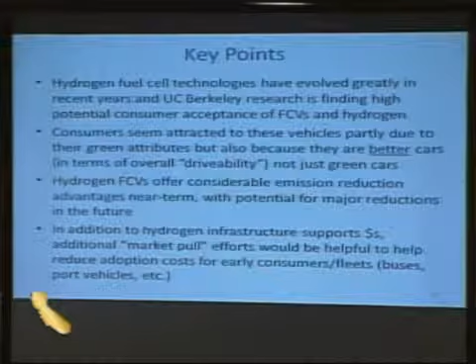And they have significant emission reduction potential near term, depending on how the hydrogen is produced, with potential for major reductions in the future, as you mentioned, if we could get to some sort of clean electrolysis with low-cost electricity. We could actually get to zero carbon, which is where I think we all agree we need to go in the longer term. Even the G7 summit, they were just talking about the need to break away from fossil fuels in a big way. And so this offers a pathway where we use natural gas initially as a bridge to that ultimate low carbon future. So we'll talk a little bit about what the state can do in a minute.

I'll go through these pretty quickly because I know you want to ask some questions. Our program started in 2005 with a Daimler A-Class vehicle, which is actually a predecessor to the B-Class vehicle that I drove up in here today. I'll show you a picture of it in a minute. In 2008, we got 3 additional vehicles, and these vehicles were all operating at 5,000 psi hydrogen, which is a little more pressure than a scuba tank. And they offer driving ranges of around 100 to 160 miles, which consumers found interesting, but they were similar to the ranges that battery electric vehicles were offering at that time.

What happened around 2008 was a move in the industry to go to higher pressure storage, 700 bar or 10,000 psi. And we built a small station in Richmond at our UC Berkeley facility with Toyota and the Air District. It actually became the first high pressure hydrogen station to become operational in Northern California. And we've learned a lot from operating that station over the last 4 years.

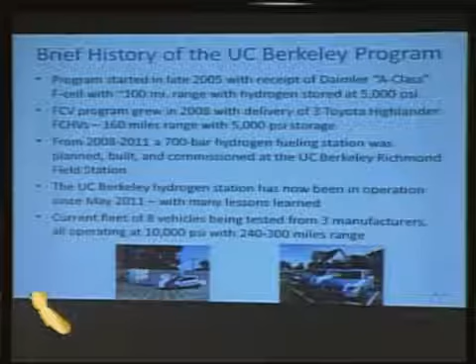I will say the infrastructure is really the key issue at this point. The vehicles, I'll show you in a minute, the consumers really like. The performance is great. We're now testing 8 different vehicles from 3 different manufacturers with ranges of 240 to 300 miles, and as you mentioned, the quick refueling capability of about 5 minutes, 4 minutes.

These are the vehicles we're currently testing. The one in the foreground here is the newest one. It's a Hyundai Tucson fuel cell vehicle that's now being leased in Los Angeles for $500 a month, which includes fuel and maintenance. The next vehicle, this is where I was this morning. It's not that exact picture, but it was that vehicle that I drove up here today, and this is the B-Class Mercedes vehicle that's about 240 miles range. Actually, a several-year-old technology at this point, but still driving great.

And then here's our Richmond station and the newest station in West Sacramento, which just became available a few weeks ago. And now you can go into the West Sacramento station, swipe a credit card, fill up in 4 minutes just like a gas station, and off you go with 250 to 300 miles range.

This is kind of an older slide from Ballard, which is a Canadian company up in Vancouver, but it shows the kind of progress through the 1990s of this fuel cell technology. And I was a graduate student, as you mentioned, at UC Davis in the mid-1990s when the fuel cells looked kind of like this, and this is 5 kilowatts of fuel cell, which isn't really even enough to drive a car. You don't really have a sense of scale here, but that was a lot of material and way too much stuff to try to put inside a vehicle.

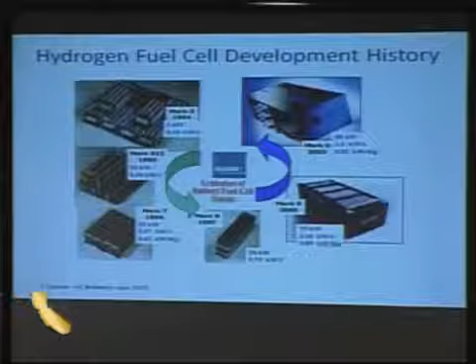But through a tremendous amount of engineering through the 1990s, by the late 1990s, we were getting 50 kilowatt stacks, which is about enough to drive a car. That's about 60 or 70 horsepower. And then fully packaged systems by the early 2000s that could offer 100 horsepower. And by the way, 100 horsepower electric is something like 150 horsepower gasoline in terms of how it feels when you're driving, because you get much better torque from electric motors, so they're not quite comparable. So this is plenty of power to drive a vehicle by the early 2000s.

This is, again, an older slide, but it shows some of the evolution from that early A-class vehicle that was about 100 miles range to this newer B-class vehicle. The size of the stack decreased by 40%. Even with that decrease, the power increased 30%, efficiency increased by 30%, and range increased by 150%.

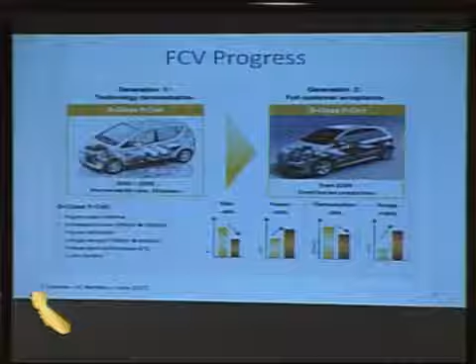So this is where people like me who had been studying the technology for a long time started to get pretty excited, because we could now see how these vehicles could really fit into people's lives, even with a fairly sparse refueling network, because it's one thing to have low range like you do in electric vehicles, but if you can plug in everywhere, that's not necessarily a big problem. But if you have low range and not very many hydrogen stations, that's a problem. So this is where the industry, I think, started to see a clear path to commercialization for these vehicles, but with the issues on the infrastructure side.

And then this is now the commercial reality of the leased Hyundai vehicle being filled in Emeryville. Again, there are several hundred of these vehicles in Los Angeles now being leased for $500 a month, which includes fuel and maintenance.

So this is a slide from the Department of Energy that shows how, from 2006 to 2008, the cost of fuel cells dropped. This is recent. From 2006, the costs have fallen 50%. From 2008, the costs have now fallen 30% from those levels, to the point where the current high volume cost estimates, and I stress high volume because we're not in high volume manufacturing yet, are now about $55 per kilowatt with a goal of $40 per kilowatt by 2020. That $40 a kilowatt is about what a diesel engine costs.

So the goal of the industry really is to bring the cost of these vehicles down close to what a diesel vehicle might sell for. And they now see a clear path to that. There is an important point, though, that for the fuel cell stack itself, you can see they've reduced the platinum catalyst greatly, but for the fuel cell stack, about half the cost of the fuel cell stack is platinum catalyst material, which is needed for the low temperatures that these fuel cells operate.

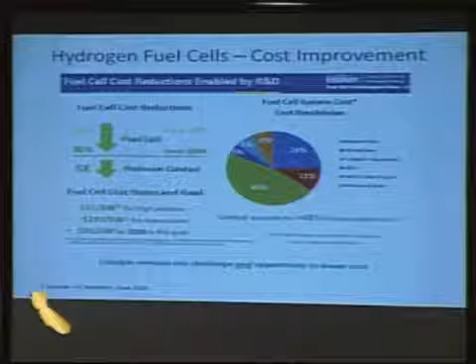There are higher temperature fuel cells. You might have heard of the Bloom box or molten carbonate fuel cells that operate at much higher temperatures for stationary power. Those do not need platinum catalysts, but they have other issues of their own. But for these lower temperature fuel cells in the cars that really operate only at about 80 degrees Celsius, so fairly cool, this platinum catalyst is needed, and it's expensive stuff, and the industry is still striving to reduce the amount of that and possibly even to find substitutes that are cheaper materials. So that's a challenge that remains.

A couple quick slides on our test program. So what we do with our cars, we don't just run them around and collect data for the automakers, although we do that too. We put drivers in the cars for 2 to 4 weeks at a time, and we say they're real people, not just Berkeley professor types. And we have them fill out before and after surveys to see what their attitudes and opinions were going into the test drive and then how that changes through a 2 to 4 week experience with the vehicle.

We train the drivers to fill themselves because we're really interested in how they perceive the refueling. Hydrogen has a lot of funny connotations to people. They think about the Hindenburg, they think about hydrogen bombs, they think about all sorts of crazy stuff that has nothing to do with hydrogen as a vehicle fuel.

I'll also quickly point out that we sort of talk about hydrogen as if it's this new thing, but industry in the United States uses huge amounts of hydrogen. About 10 million tons of hydrogen are produced and used each year in industry around the United States for mostly petrochemical uses, fertilizers, metallurgy, that kind of thing. So it's not a new thing. It's just new to be dispensed as a retail vehicle fuel.

By the end of June, we'll have 50 drivers through our Toyota study, which is a month-long test drive study, and then we're also putting drivers in the Hyundai cars now. And what we find is that this says, overall, how has the FCHV met your expectations? And for most of the people, it either greatly exceeds or exceeds their expectations. Some people say it met their expectations, and no one, this is when we had 36 drivers through, these are slightly older numbers, no one was disappointed in these vehicles.

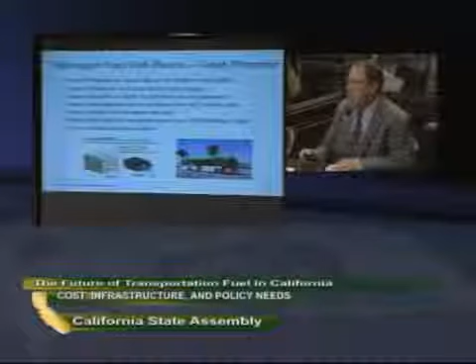I want to touch on the hydrogen buses because this is something I really think we could do a lot more with. The hydrogen bus technology is also greatly improved in terms of packaging, getting the systems down to fit in the buses better. AC Transit, as many of you know, has a fleet of 12 buses now that have been operating for a number of years. They had their first bus in 2005.

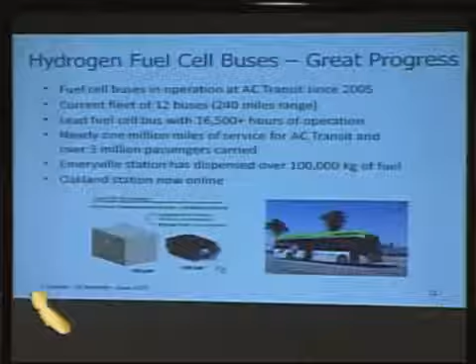One of the buses has operated for more than 16,000 hours, which has exceeded the durability that many people thought these fuel cells could produce before they would need to be replaced. Nearly 1 million miles of service and 3 million passengers carried. And the Emeryville station has now dispensed over 100,000 kilograms of hydrogen fuel, mostly for the buses, but also the light-duty vehicles can come in and fuel on the other side of the fence now. And they now have an Oakland station as well, and they plan to expand this fleet to at least another dozen buses when they can get the funding.

And we also did a survey of the fuel cell bus drivers, and these people are in contact with the technology for hours every day. Some people had surveyed the bus passengers before, but very few people had surveyed the bus drivers, and these are the people who really have a feel for the technology. So we got about 50 bus drivers to respond to a survey, and they really liked particularly the quiet operation.

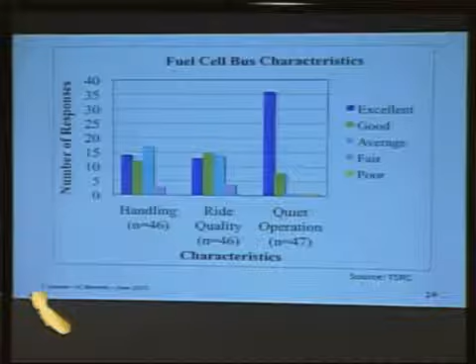You can imagine compared to a diesel bus, if you're in these things all day long, they rated that very high. They liked the ride quality, thought the handling was very good. Acceleration was excellent compared to the diesel buses. Again, you get very high torque out of these electric motors, so they're fun to drive and good for urban bus settings where there's a lot of stop-and-go driving and they need to duck in and out of traffic a lot.

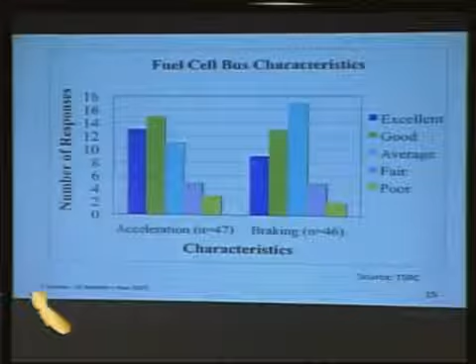The braking, there were some issues, and one of the bus routes is on a very hilly route, and that's where most of these concerns were. So there were some concerns with the braking, and these vehicles have regenerative braking. Maybe that's something the industry can work on a little bit more. But overall, kind of similar to the vehicles, many of the drivers liked the buses much better. Some said the same. A minority didn't like them as well.

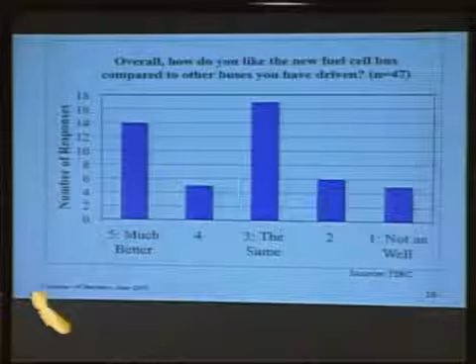So I want to switch a little bit to the emissions question with just a couple slides. This is a national view. So this uses a model called the GREET model out of Argonne National Laboratory. It was initially developed by a colleague of Dr. Turrentine and myself at UC Davis, and he's gone on to develop this model over the last 20 years at Argonne. And it shows something kind of important. So kind of forget the plant cycle for now. That's just the manufacturing plant.

But some people will say, well, these vehicles are great, but it takes so much energy to make the batteries and the fuel cells that they're going to have higher carbon emissions than a conventional vehicle because of all those manufacturing emissions. I even saw a study that said it was better to drive a Hummer than a Prius because of the batteries in the Prius, which is completely wrong-headed. And this kind of shows that. The vehicle cycle are these yellow bars. And you can see that it's true that the yellow bars for the electric vehicles are a little bit higher. So each electric vehicle, when it's new, does start with a little bit of a carbon debt compared to a conventional vehicle. It has more embodied energy and emissions.

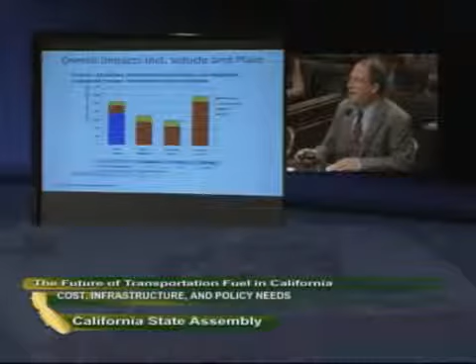But then in use, which is the orange and blue, well to pump and pump to wheels, you can see that on a grams per mile basis, fuel cell vehicles and battery electric vehicles running on natural gas, again, you really have to ask where the hydrogen and electricity are coming from, offer much lower in-use emissions, even though they have slightly higher manufacturing emissions. So that's just one kind of myth I like to dispel.

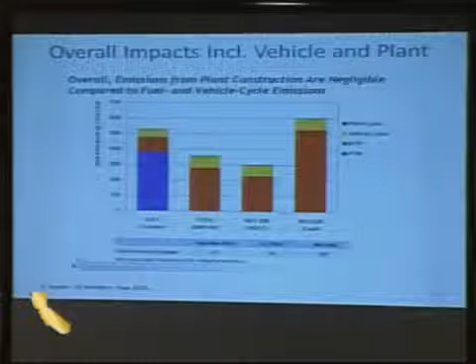So here's a slide for California, more relevant for us, that shows if you're using what we call the California mix for hydrogen, and that's 67% natural gas, 33% renewables. And you need to do that in order to qualify for the state money to build the hydrogen stations. In order to get that money, if you're not 100% renewable, you have to be 67% natural gas, 33% renewable. And then here's electricity from the California mix.

So you can see here in California, the battery electrics or plug-in hybrids, where there's a lot of electric miles, are actually the cleanest option. And for people who can make those vehicles work for their lives, that's a great choice. For other people, though, and this might include people who live in multi-unit dwellings who don't have easy access to charging, almost 50% of Californians do not live in single-family homes. In San Francisco, 70% of people do not live in single-family homes.

Now, maybe some of those people can charge at work and can still make a plug-in work. But for a lot of people for whom plugging in is difficult, hydrogen from the California mix stations offers very close to the same emission reductions. I have a question about that. Yep, go ahead. The comparison, the middle one is essentially comparison with the biodiesel mix.

E85 is 85% ethanol and 15% gasoline. And that typically would be a corn-based ethanol in this market. Of course, as I think we'll hear later, and maybe as brought up in the last talk, we're trying to get to cellulosic ethanol, lower carbon types of biofuels. But this would be conventional ethanol, typically corn ethanol, 85% with 15% gasoline.

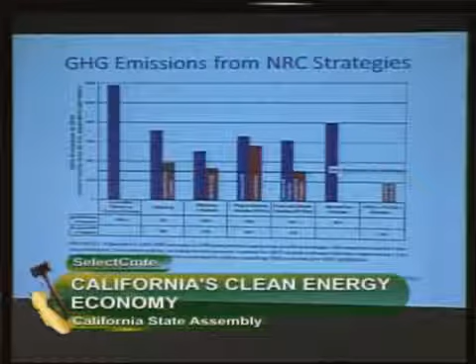So this is kind of a key slide I wanted to spend just a minute on. So again, on emissions, this is a National Research Council study from 2013 looking at scenarios now, not just sort of single pathways of fuels and vehicles, but scenarios for how we can get to 80% reduction from 2005 levels. So where we really think we need to get by 2050. This is kind of a 2050 type view.

And so you see this is conventional kind of business as usual scenario. And then the blue bars represent kind of a reference current production technology. The red bars assume some future progress in production technologies in terms of efficiencies and so forth. There's a lot of assumptions here that are too much to go into. But they're basically then these key scenarios.

So here's an efficiency scenario, basically think about a lot of hybrid vehicles and more efficient combustion strategies. And in this case, a carbon price and a feebate scheme to drive people into those vehicles. So there's sort of a lot of things going on. But it actually looks like that efficiency scenario could get pretty far, especially with a lot of assumptions and progress.

The next one includes biofuels with some carbon capture and sequestration, that's CCS. So if you believe you can do carbon capture and sequestration, and I'm a little skeptical of that personally, then maybe an efficiency plus biofuel strategy could get you very close to this level.

The next one is a heavy plug-in electric vehicle scenario, where you have lower greenhouse gas grid, but again, given the baseline that we're working off of now with heavy coal in the Midwest and about 50% coal nationwide, that doesn't really get you there if it's just pure plug-in vehicles, assuming progress from our current grid. Of course, there are ways to get there on an individual level if you want to put solar panels on your roof and that kind of thing.

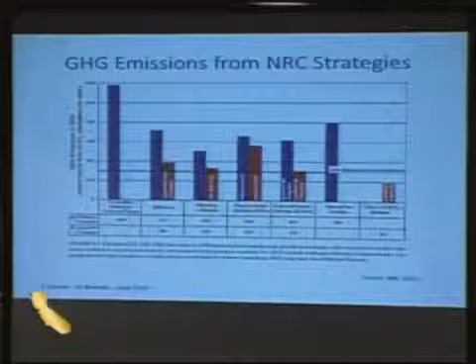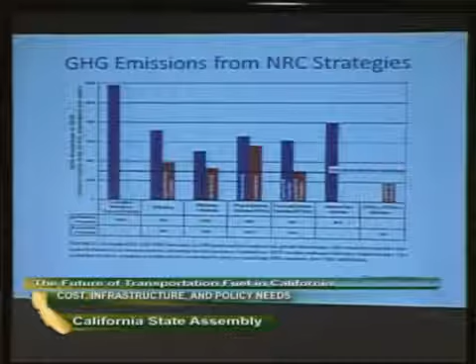The heavy fuel cell vehicle scenario with lower greenhouse gas hydrogen production, so thinking about biofuel feedstocks for hydrogen, clean electricity, and so forth, can get you there, it appears, from this scenario. And if you just burn natural gas, that's not a good solution. That doesn't do it. But then this last scenario, where you have plug-in electric vehicles, fuel cell vehicles, and biofuels, can get you significantly below the target and perhaps requires less aggressive market uptake to achieve those levels.

So the kind of punchline here is I want you to not think about, is it fuel cell or plug-in electric or biofuels? We need them all, because not any one of these things can really probably do it on its own. It's not the all of the above energy policy of the Obama administration, because that includes the fossil fuels that we want to get rid of.

But I do think there's a very strong argument for a scenario that includes plug-in electric vehicles for those who can make those work for them, fuel cell vehicles for those who have longer driving distances and maybe don't have access to charging, and then biofuels where we still use liquid fuels for other applications.

So I don't know, I think I'm running out of time here. Let me just conclude quickly. The support for the hydrogen infrastructure that's going on right now from the legislature, I think, is excellent. It's very well timed. The eyes of the world are really on it, I can tell you, from traveling outside of California. The support for light-duty vehicles through the Clean Vehicle Rebate Project is likely to be helpful, particularly as we get more fuel cell vehicles on the marketplace and more consumers out there trying to adopt them.

The federal government incentive of $8,000 has just expired at a kind of awkward time for fuel cell vehicles, but that's not really a concern for California. I think we're doing what we can. By comparison, though, the Japanese government is offering a $20,000 incentive to bring the cost of the next generation fuel cell vehicle by Toyota, is what they're really focusing on, from $60,000 down to $40,000.

So I would think what we really want now are some complementary programs to look at some other market segments, fuel cell-powered trucks, not necessarily long haul, but drayage vehicles for ports. Ports are very dirty, and they have a lot of needs for electrification that I think we could look at. The buses are doing an amazing job in the Bay Area, and I think support for additional bus programs could be very helpful. And then delivery vehicles, garbage trucks that wake everyone up at 6 in the morning. I think people would love it if they were a lot quieter.